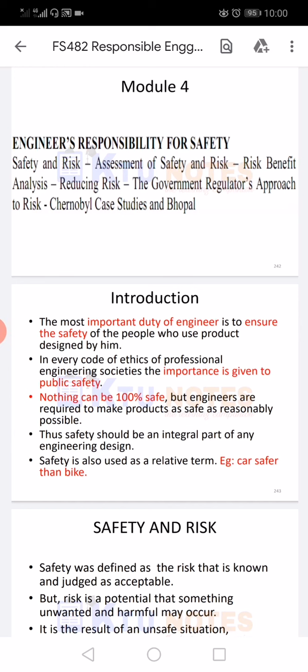Now, safety and risk. Safety is freedom from risk, and risk is possibility of suffering from loss. For example, we have heard that smokers are more likely to get cancer, but that does not mean that non-smokers don't develop cancer. The most important duty of an engineer is to ensure the safety of people who use the product designed by him, whether it be a building or an automobile or an electronic device. In every code of ethics of professional engineering societies, utmost importance is given to public safety.

So, when we are designing an object, we cannot assure that it will be 100% safe. But of course, we can make it as safe as possible. Thus, safety should be an integral part of any engineering design. Now, safety is also discussed as a relative term. That is, people generally have a perception that a car is safer than a bike.

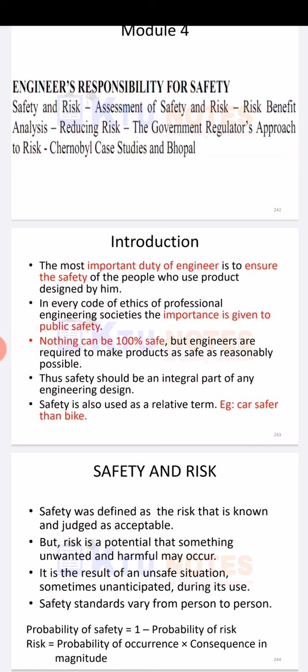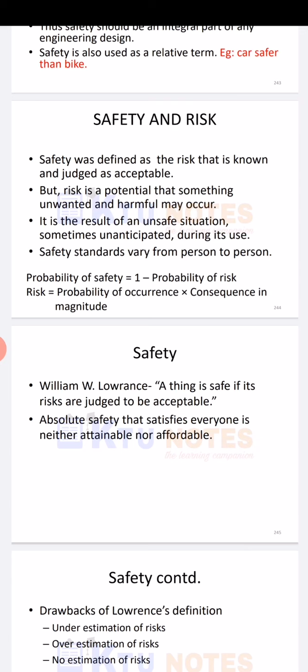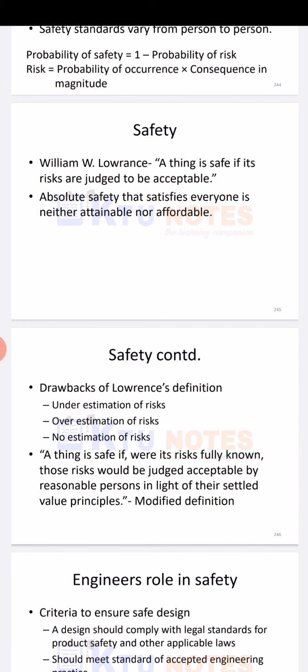Here, safety was defined as the risk that is known and judged as acceptable. Risk is the potential that something unwanted or harmful may occur. So, the safety standards vary from person to person. William W. Lowrance defined safety as: a thing is safe if its risks are judged to be acceptable. But the drawback of Lowrance's definition is underestimation of risk. The risk may be underestimated, or the risk may be overestimated, or it may not be estimated at all.

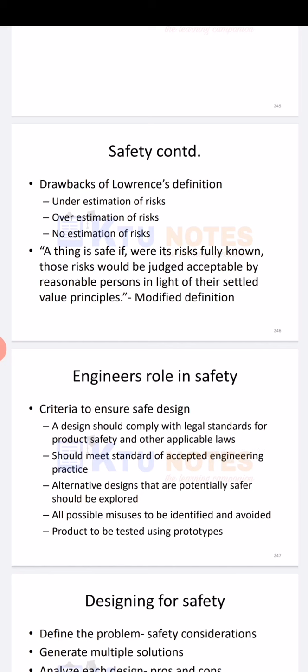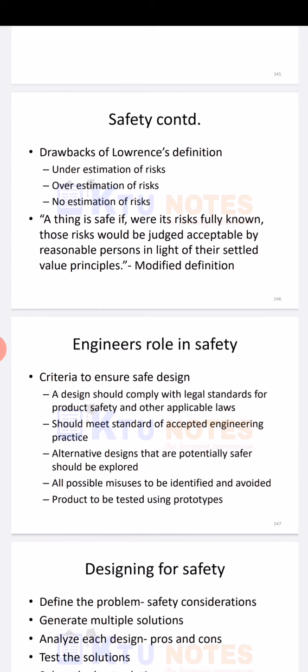So, a modified definition for safety is suggested: a thing is safe if, were its risks fully known, those risks would be judged acceptable by reasonable persons in light of their settled value principles. Now, what is the engineer's role in safety? Safety of people, property, and environment is to be ensured by an engineer by ensuring that the design is safe.

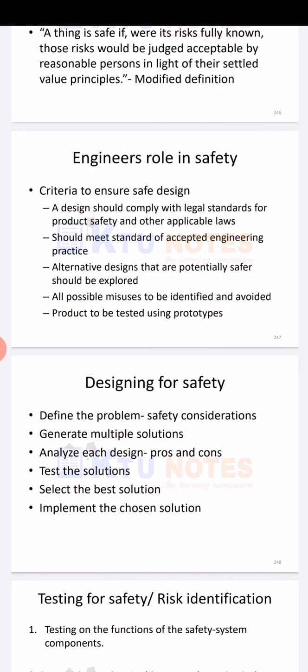Now, the criteria to ensure a safe design consists of the following steps. That is, a design should comply with legal standards for product safety and other applicable laws, should meet standards of accepted engineering practice, alternative designs that are potentially safer should be explored, all possible misuses to be identified and avoided, and product to be tested using prototypes.

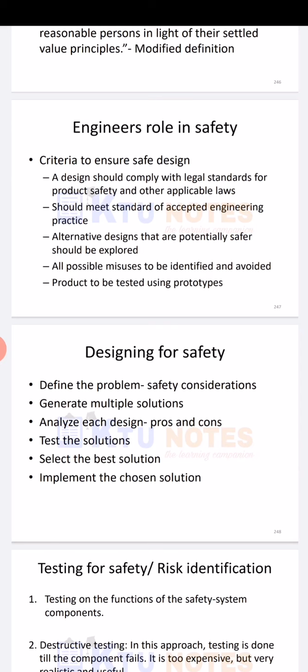Now, how do we design for safety? The steps for designing for safety are the same as the steps for design. That is, first we have to define a problem. Here the problem will be considering safety. The problem statement will include a safety portion with it. Then generate multiple solutions to solve the problem. Analyze each design, then test the solutions and select the best solution. And we have to implement the best chosen solution.

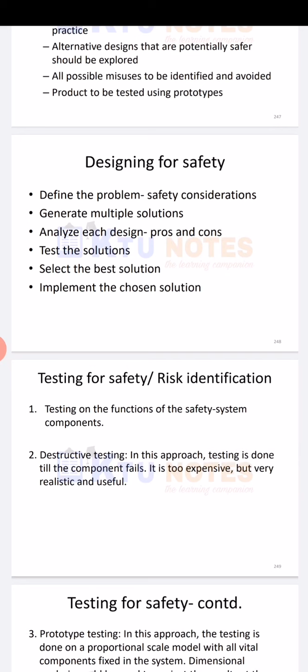Now, how do we test for safety? Testing for safety can be done in 4 ways. First one is the functioning test. That is, whichever product we are designing, it will be tested for its functioning. What are the functions to be performed by a particular design? What are the expectations of the consumer? Are these functions working properly? These will be the testing criteria.

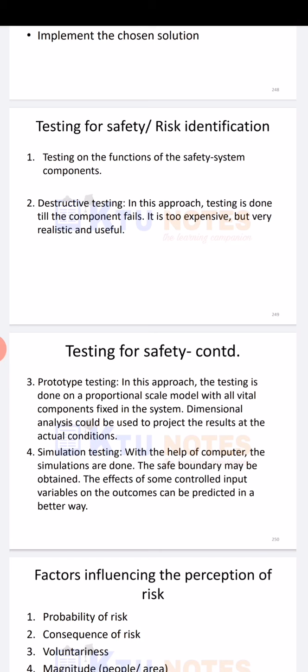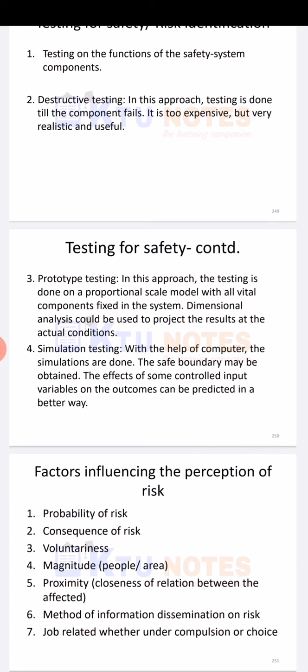Then we can do destructive testing. Destructive testing is too expensive. That is, we will be testing it till the component fails, but it's more realistic and useful. Then the third type of testing is prototype testing, where we scale a model. A similar model will be placed and all the tests will be carried out, and dimensional analysis can also be done. And the fourth type of testing is simulation testing, which is done with the help of a computer. We simulate the particular conditions and circumstances and check the response of the design to the circumstances.

Now, what are the factors influencing the perception of risk? Risk perception is the subjective judgment that people make about characteristics and severity of risk. That is, the probability of risk, consequence of risk, and voluntariness, whether the person is willingly taking the risk or is he compelled to take it. Then magnitude, the people or area involved in the risk, proximity, method of information dissemination on risk, and job related, whether it is under compulsion or choice.